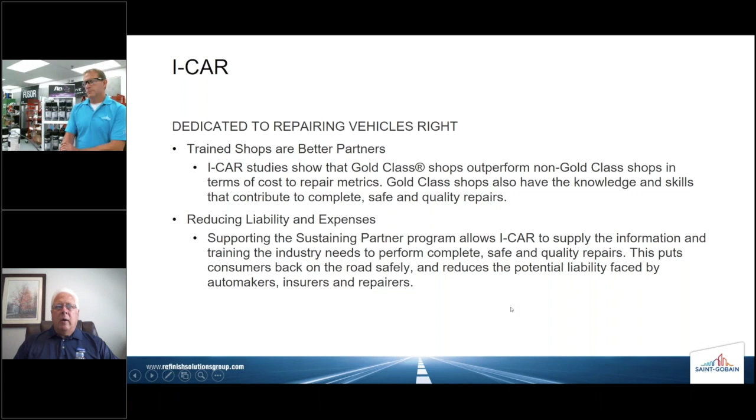This helps reduce liability and expenses in the industry, and that, in conjunction with following OEM procedures, can really help keep a shop out of the woods, out of trouble. Supporting the Sustaining Partner Program allows I-CAR to fully supply the information and training that the industry needs to perform safe and quality repairs. The end game is that it puts customers back on the road quicker, better, faster, safer, and reduces potential liability faced by automakers, insurers, and repairers. Everyone, all the stakeholders in the repair process.

Let me go back to that slide there for a second. We are dedicated to repairing vehicles right and providing the repair information. The education and information I-CAR provides emphasizes the importance of using quality parts and services and OEM repair procedures.

From time to time, I'm still surprised at the number of shops that I visit that when you ask the first question about how they built their repair plan, how they developed their blueprint for repairing the vehicle, it doesn't include consulting OEM procedures, and that's really a very important part of the equation. OEM repair procedures change from one model year to the next, depending on materials and new developments or new modifications to a vehicle. And it's really important to consult those repair procedures every time.

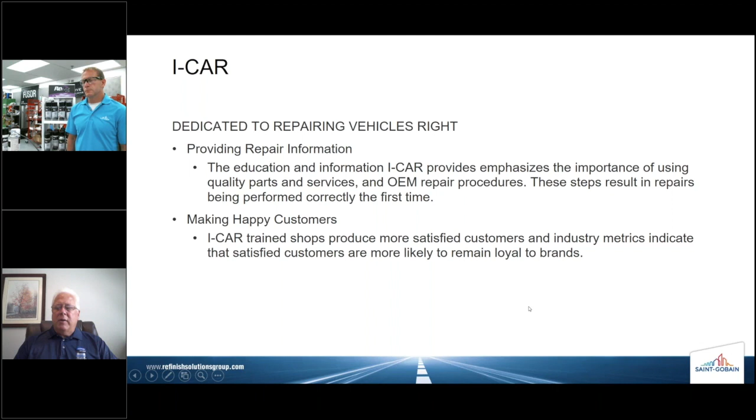I-CAR wants to make customers happy, of course. I-CAR trained shops typically produce more satisfied customers and better metrics overall, including all the key performance indicators, key productivity indicators that are used in a shop.

Testing. There will be a test at the end of the course. If you're paying close attention, you'll pass the test very easily. Passing the test will allow you to receive a certificate affirming completion of this course. Once that certificate is in your hand, you may apply to I-CAR for the appropriate credit. I'm happy to add that most of that process now is done electronically. There's not a lot of paper shuffling between us and the end user and I-CAR, and it really cuts down the time involved in obtaining certification. Passing that test will allow the student to apply for that credit of 1 hour.

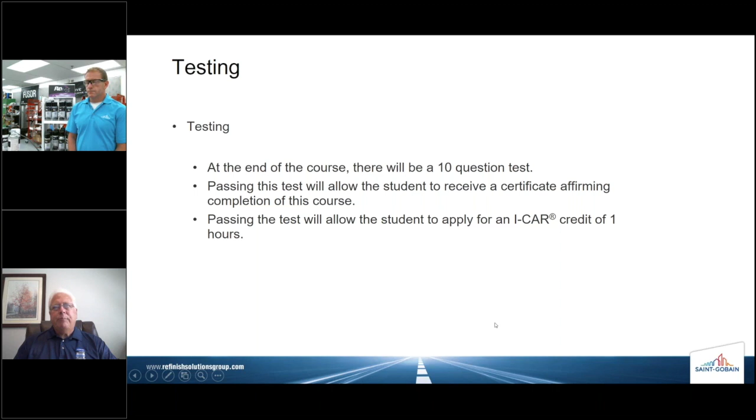So no presentation on collision repair training would be complete without a reminder about safety. Probably 6 or 8 months ago, the only folks that might recognize the acronym PPE would have been people in the healthcare industry and perhaps in the collision repair industry. But now PPE is an everyday household term, unfortunately, thanks to the pandemic environment that we're living in. But in any case, whenever you are attempting a repair, make sure you're wearing proper PPE, practice safe habits, keep sparks and flames away from the area, avoid skin contact, wear gloves, protect your eyes, of course.

And I say wear gloves even though you may never have had a particular reaction or allergic response to a chemical or a series of chemicals in the shop. Those types of reactions happen over time, and at any time you can develop an allergic response to some of the products that are used in a body shop. So protect your hands and your family, of course, as well. In the event that you happen to get eye contact, please immediately flush with water, contact a physician, and make use of an eye wash station in the shop as soon as possible.

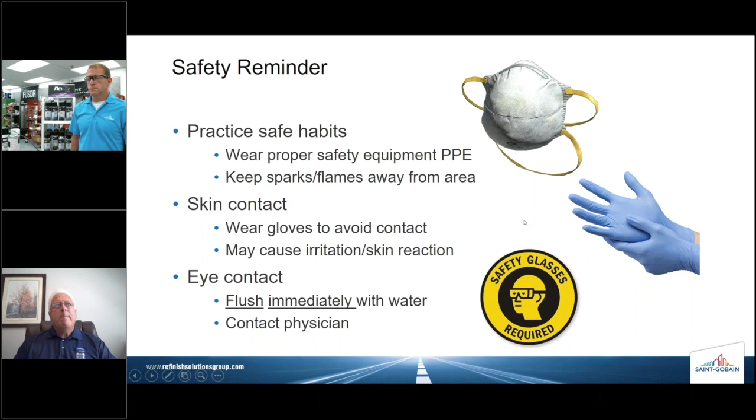The objectives in this course are going to be to talk a little bit about the proper handling of aerosols. We're going to introduce you to the 3 C's of aerosol product use, which are cleaning, coating, and corrosion protection. We've broken it down into those 3 categories. We think that it makes the most sense, and hopefully you'll find that to be the case as well. So I think this is your cue, Dennis, to step in and start talking about the actual products themselves, and I may chime in from time to time here.

I hope you do. I apologize to everyone. My computer screen will probably be delayed just a few seconds. There we go. Thank you.

Proper handling, right? So we want to make sure we shake the can just like this, for 2 minutes, and use it in a well-ventilated area. No, I'm not going to read the slides. Just make sure you're in the right temperatures. I'm in the Northeast. It's going to be cold here in about 3 months. You want to make sure that it doesn't get too warm or too cold. So if you can keep it around 68, 70 degrees, we're going to be in good shape.

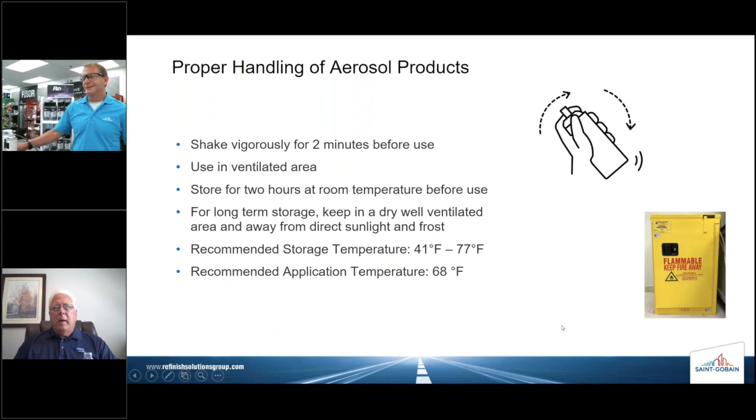I know it takes a little bit. Yeah, well, it's taking a little bit on my end too. Not sure what's going on. It happens. There we go. We'll get there.

Should have. So, got it.

So to maximize the lifespan of the aerosol, you want to make sure you invert the can upside down and clear it out so it doesn't get plugged up. You want to make sure the nozzle is clean. If there is a little material on it, grab some thinner, grab our spray gun cleaner, wipe the nozzle off, and you're good to go. Again, invert the can, spray out some material just to make sure it's cleaned out, and you're good to go. That's something that's commonly missed though, right Kevin?

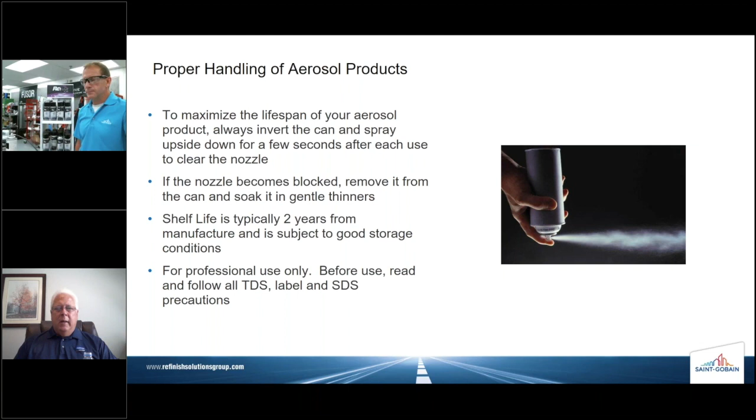Not inverting the can, it is. Yeah, it is. You know, I've seen a lot of pretty drippy looking cans in the shop, and it never ceases to amaze me at the surprise shown by the technician when it won't spray properly. Absolutely.

So clean the vehicle first. Make sure you take care of it with the solvent-based wax and grease remover, wipe dry. Use an anti-static anti-silicone degreaser. We want to kill the static just to make sure that we don't attract any dirt. And make sure that you wipe in one direction.

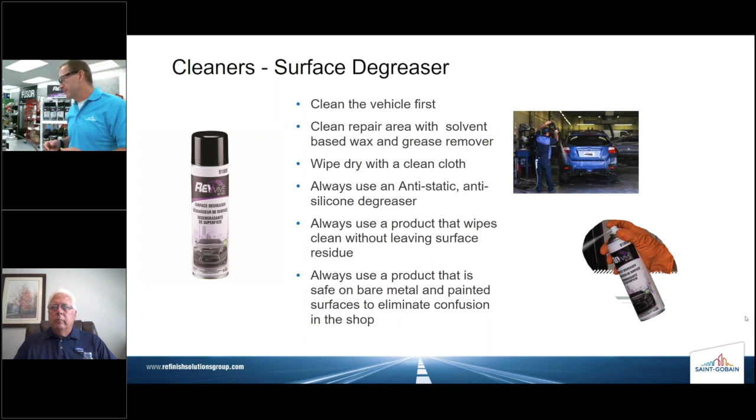Okay, because the idea of the cleaner is it floats the contaminant to the top. You want to wipe it away in one direction. If you go like this, it just kind of smears it around. So if you roll it, wipe one direction, roll the towel, and go like that, you're in good shape. Keeping it clean.

You get that, Dennis? It's getting there. It's getting there. It's like a fade. I think they slowed down the internet today.

There we go. Spray gun paint removers. If you put it in an aerosol, you can take a gun like this, go ahead and put an aerosol right into it. It's going to be a faster way to clean the gun, because it's pressurized, right Kevin? So instead of dunking the gun in thinner, we're going to put an aerosol into here. It's got pressure behind it. It's going to clean real well, and it's going to be a faster way to clean the gun. So be aware of that.

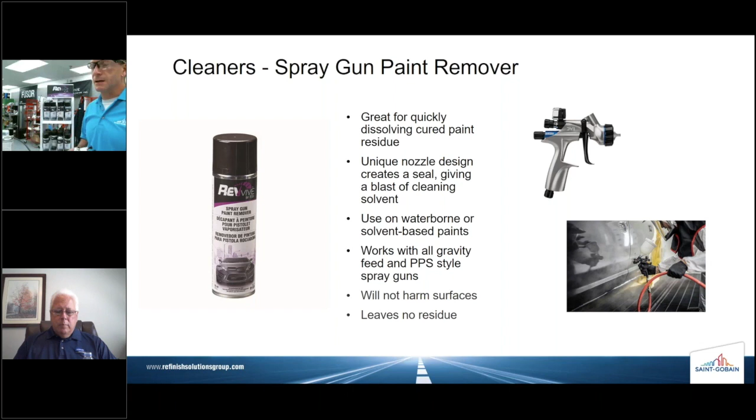That nozzle design gives you a nice seal too. Absolutely, yep, little rubber gasket on there, and you shove it right into there, and pull the trigger, depress the trigger, and it comes right out, and it does a really nice job. Really speeds up that cleaning process. So important, right? Excellent.

Aerosol coatings. So we have an array of coatings that are duplicating the colors of e-coat. And a great picture right here of an e-coat tank. But if you damage or have to remove some of the e-coat to maybe resistance spot weld, but then you need to put that colorant back, we have an array of colors, anywhere from black to gray to white to a couple olives, and they're going to match that OEM.

So that's really what's going to be really nice. It can be used as a direct to metal primer. It has good corrosion protection. You just want to make sure you get enough of the material on, and then you'll be good to go. But that's really a critical time, not only to take care of those bare metal areas.

But also, Kevin, if you have let's say a black e-coated part that you're putting on the car and it actually was an olive green, you need to change that color. This is a good way to do that. I know several shops in my area that will do that. So consider that as part of the process.

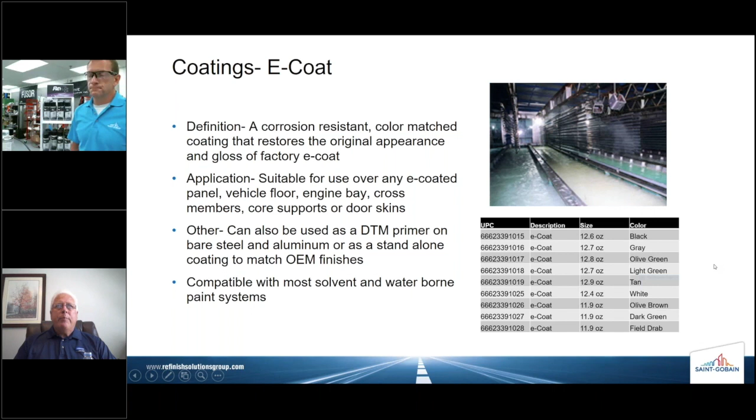Yeah, and to your point, Dennis, a lot of OEMs are starting to get very particular about reapplying primer or applying the correct e-coat coloration on the inner surfaces as well as the outer surfaces. So we've got some great solutions here for you. Sure do. I'm going to match that color too. Really nice.

So how are we going to do it? We're going to use our cleaner, our degreaser. For bare steel and aluminum, you want to sand that with at least P320 grit. No etch primer required, direct to it. Shake the can thoroughly for 2 minutes, apply 1 to 2 coats, 5 to 10 minutes between flash, and you're good to go from there.

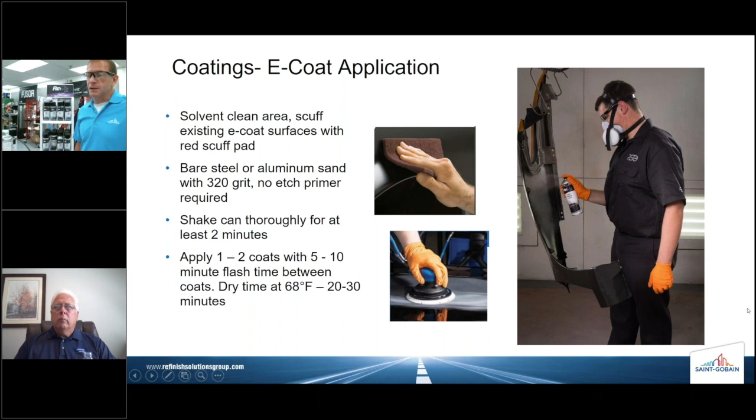Hey Dennis, why is it important to allow that flash time? What could be the result otherwise? Great question. So if you don't, you're going to trap solvents in there. And trapping solvents is bad because all the solvent will leave the job. We want it to leave when it's fresh and not a few months later. If you pile a couple coats right on top of each other with no flash time, that's when the solvent will leave down the road.

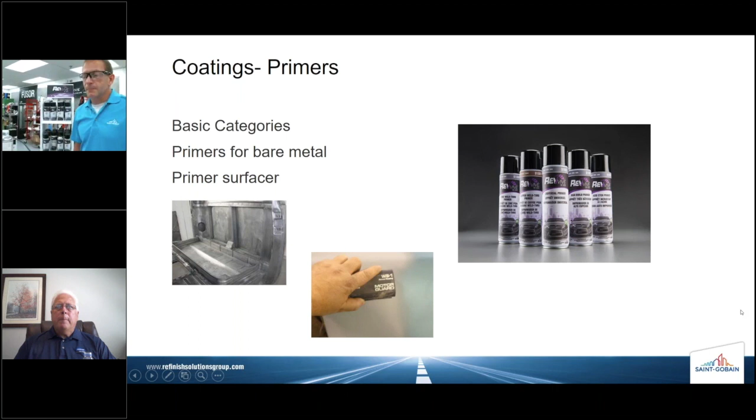Good point. We do have an array of primers for bare metal and primer surfacers, high build to acid etch, and whatever your need is, we can take care of that.

Weld-thru primers, great adhesion and an inhibiting formulation. It goes to bare metal, galvanized. Both formulations have corrosion inhibiting agents. When you do weld, you want to pull that material back from where you're actually striking the torch.

A lot of manufacturers are going to require you to use a weld-thru primer, so you want to do what they ask. And it'll have great corrosion protection if you're spot, MIG, or TIG welding.

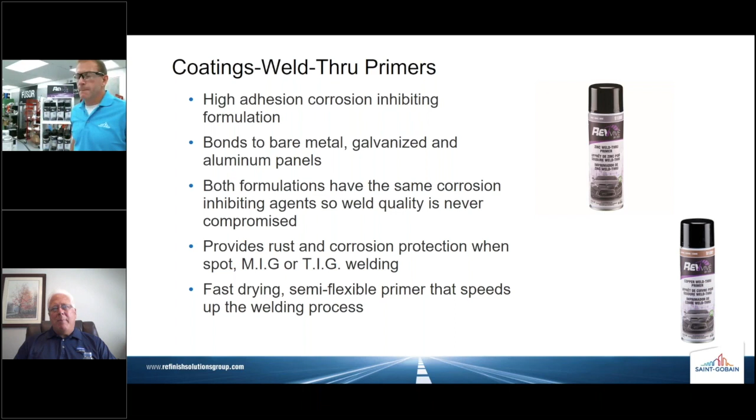Hey Dennis, I know you're a certified instructor for welding with I-CAR. What is I-CAR's position on the use of weld-thru primers? Are they optional, mandatory, what do they think? So I-CAR is going to revert back to the OEM, and if the OEM says to use it, then that's when you're going to use it.

I believe Honda just came out with something on the use of weld-thru primers. I can't remember exactly, but I thought there was something there. Some manufacturers are going to say to use it, a lot of them, and a few may say not to. Just do what they say, and that's what we're going to go along with. OEM procedures, OEM processes trump all.

So with the weld-thru primers, you want to clean it, you want to abrade it to 180 to 220. Again, apply 1 to 2 coats depending on how you spray it. Allow your flash time, 10 to 20 minutes between coats depending on your heat. Film build, heat, humidity is going to change that. And again, remove that away from where you're going to strike the torch.

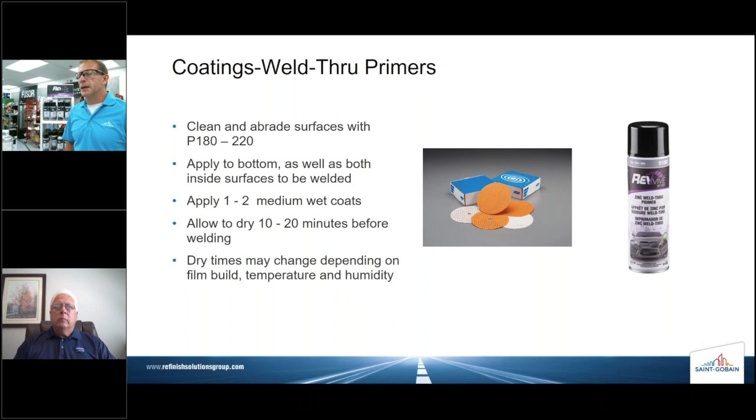Got a new one here. It's coming. There you go. Rocker panel texture coating.

And this is something, Kevin, that's just not going away, and it's a great thing, right? The whole idea of it is to add a coating so it can absorb chips, rocks, and all sorts of debris that's flying around, on road surfaces, sometimes on a dirt road, whatever. We want to protect that paint coating and really protect the metal.

So the manufacturer will use a texture coating, and you see it right there, a durable coating that protects against stone chips, salt, and whatever else it's going to beat up on it. We have a great rocker texture coating, and you do not want to over apply this material.

Let me explain that. You're going to apply a medium wet coat, let it flash. Critical thing here, Kevin: if we pile on 3 coats in one sitting, it may look okay, but there's a truckload of solvent in there, and that solvent's all going to leave, which could potentially cause problems down the road.

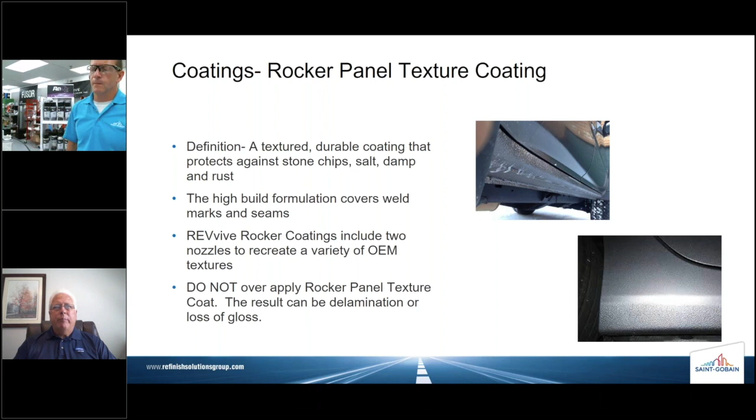I think it's also worth noting that the REVvive rocker coatings include 2 different nozzles, so with a little experimentation you can duplicate a whole bunch of different textures and shapes and sizes of rocker coating. We would encourage a shop to do some spray-outs before they actually apply it right to the job, and dial in exactly the build they're looking for. Absolutely, don't practice on the car.

So one more slide on texture coats. Surface prep.

You got that yet? Got it. Just came through. Surface preparation.

Make sure it's clean, degreased, dried. Abrade either wet or dry, 180 to 240 grit. Make sure you have our etch primer down first if there's bare metal, then shake it for 2 minutes. Apply 1 to 2 coats around 25 centimeters back. You can adjust that distance - the farther back you get, the smoother it is, the closer it is, the more texture. It's kind of like spraying, but make sure you wait your flash times between coats.

So tricky question there, 25 centimeters. What are we looking at there? I'm going to say that's about 8 to 10 inches for those of us on the American system rather than the metric system.

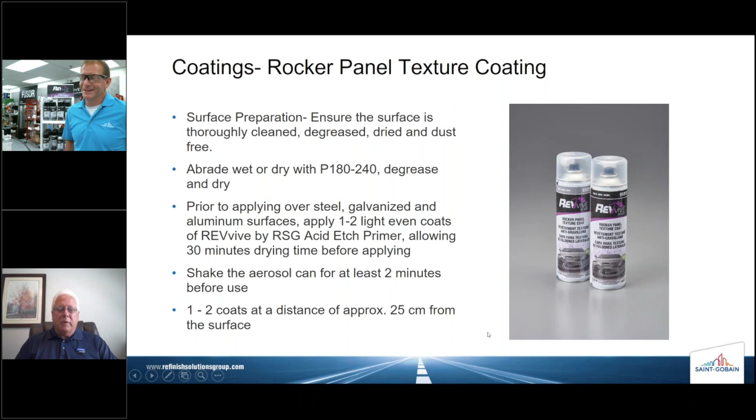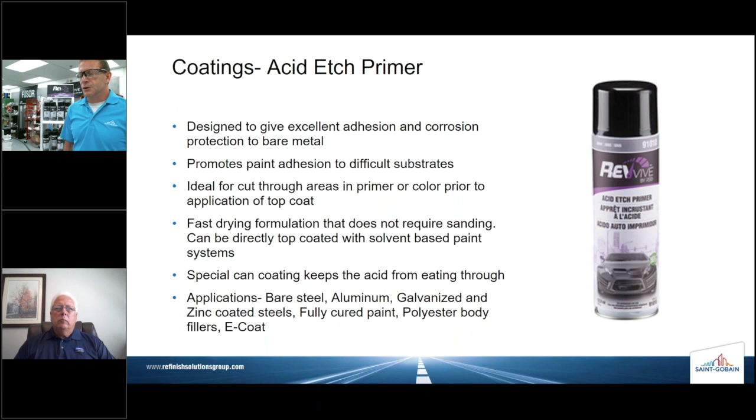So how about that acid etch primer, Dennis? How about that acid etch primer, Kevin? It's designed to give excellent adhesion and corrosion protection on bare metal. It's not designed to be over-applied - it needs to stick to the metal. Ideal on cut-through areas, and fast drying gets you through that. When you say cut-throughs, anything in the front end of the car, you want to deal with that. On bare steel, aluminum, galvanized, zinc - whatever you have, that's what you want to work with there.

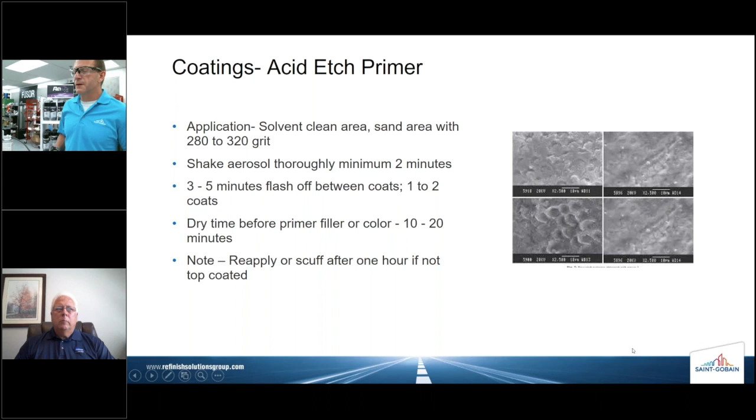Make sure it's clean when you're working this product. Sand it with 280 or P320 grit. Shake it again for 2 minutes - very common. 1 to 2 coats of it, and then if you're going to put primer, filler, or color, 10 to 20 minutes dry time. If you're going to reapply, scuff it after 1 hour. It's not top coated - really, really nice product here.

And now we're at the portion of our presentation where things get kind of interesting here. We have a complete line of material designed for corrosion protection in the REVvive product line. Dennis is going to talk to you a little bit about the products included in that category, starting off with rubberized undercoating.

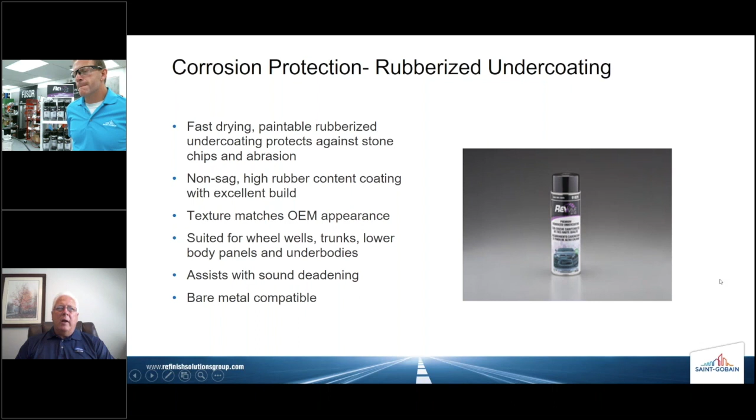Thanks, Kevin. So rubberized undercoating has a high use in the collision shop. The undersides of the car will have this, potentially from the dealership. This is a non-sag, high rubber content, black coating. It's going to match that OEM look, nice for the wheel wells. It's fast drying and it looks really good, and it can go onto bare metal. It's a great sound deadener as well, and it's not one of those thin, cheap asphalt-based products out there. This has definitely got high solids and great content to it, and I encourage you to give it a shot. Meat and taters, right, Kevin? Yep.

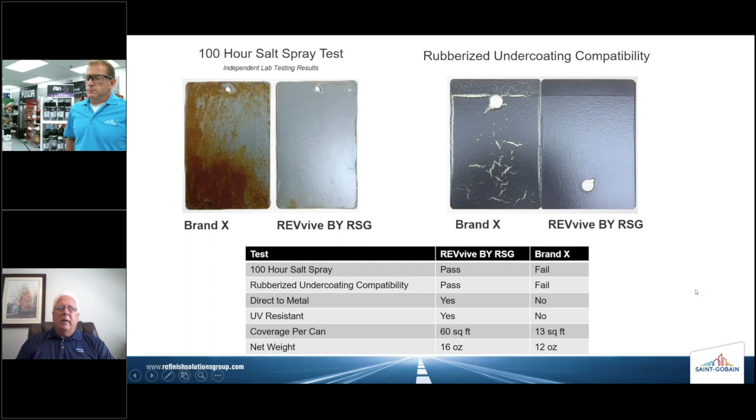All right, this is kind of cool - our rubberized undercoat, how it goes against other brands in salt spray testing. I think the picture says it, I don't really need to add much to it. No, but the salt spray testing is a pretty key OEM metric or test. Whether it's 100 hours of salt spray or cyclical salt spray, most of the OEMs are looking for some type of test data that supports that type of product, or to support any product of that type.

So here's one of my favorites - corrosion protection cavity wax. Why do we use it? Well, because the OEMs want you to use it. It's a really important part of the process - up until the last probably year or so, the OEMs want you to use this product, right, Kevin? Not only on a repair area, but also on new parts that you replace. They want you to put cavity wax in there even if it didn't come with it. They want you to put it in there after it's painted. Very, very important piece of coatings that go into that vehicle.

Yeah, I couldn't agree with you more, Dennis. And this product has really come a long way. I'm kind of an old guy, so I remember the days where Ziebart and Rusty Jones used to offer rust proofing services and cavity wax protection, and even some shops and service departments got into that type of installation. It required some 55-gallon drums of material, long wands for application, drilling and cutting - and it's not like that anymore at all.

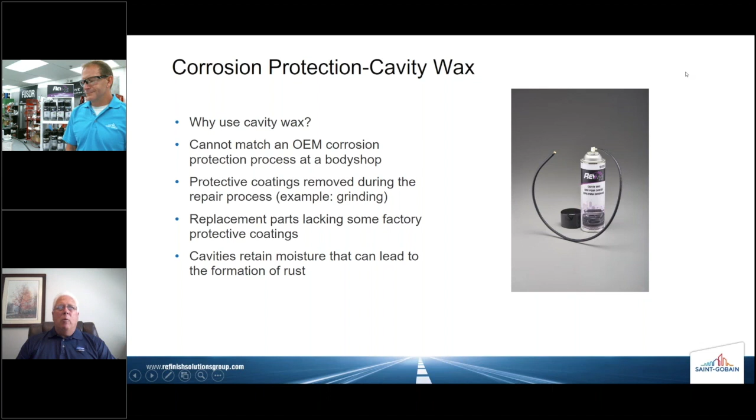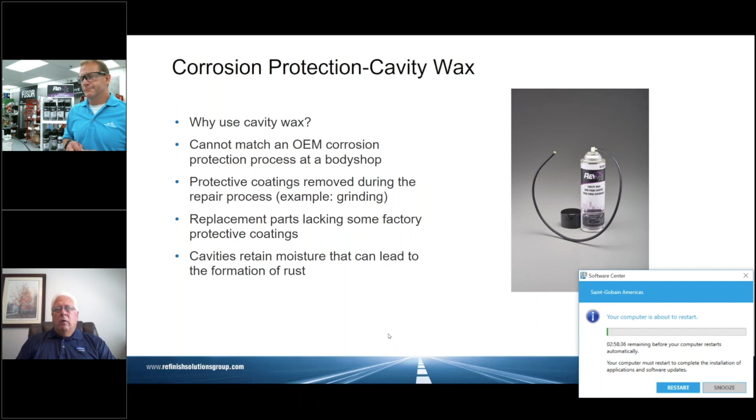No, we have this down pretty much to a science, and the product is extremely easy to use, cleans up well, and in fact, if we can, I think we're going to try and do a little live demo here. Little demo here, little demo action. Set up.

So I like to do this. I like to grab a high-visibility tape, I'm grabbing the American OEM tape, and Kevin, I like to tape the end of the wand. I'll tell you why I like to do this. I do not want cavity wax in my face. Sounds fun, but I really don't want that. So when I insert it in, as it comes out, as soon as I see orange, I'm going to let go of the trigger so I don't get the 360-degree spray in my noggin or wreck my nice shirt.

Putting my gloves on. I've got a little wand right here. Okay, so check this out. All right, get the wand right in there. And I have shaken this already, and watch this.

What you do, let it flash, rotate the wand, which I did, and do another application. And that's it. As soon as I see orange, it's spraying that. Notice that it's coming out all around the base of the nozzle in roughly a 360-degree pattern. And what that means is that you're going to get coverage on the inside and outside of any cavity area, rail run channel that you happen to be trying to seal out.

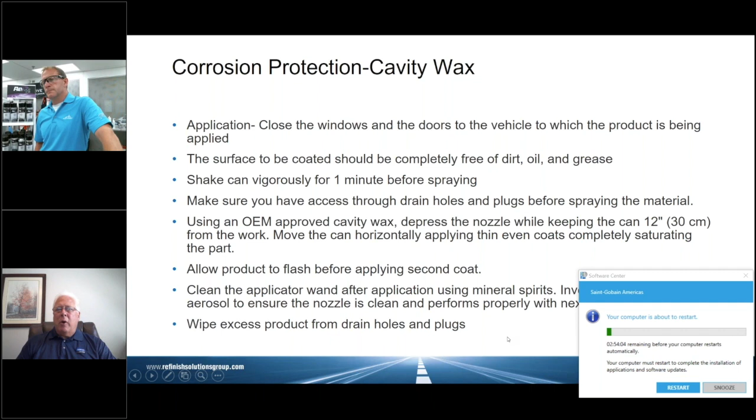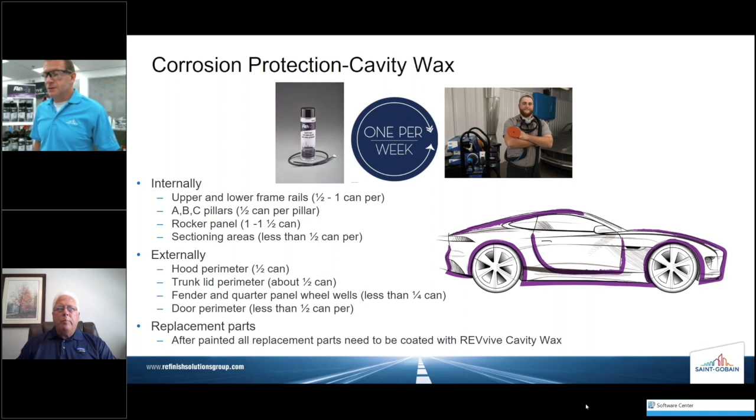Dennis, you want to bring us home here with some of the applications and areas? Absolutely. So, you see anywhere that's highlighted in purple right there is possibly where that material is going to go, depending, right? Your doors, your rockers, rear body panels, front fenders, hoods, anything external. Replacement parts, something you've painted, most likely the OEM is going to want a cavity wax application.

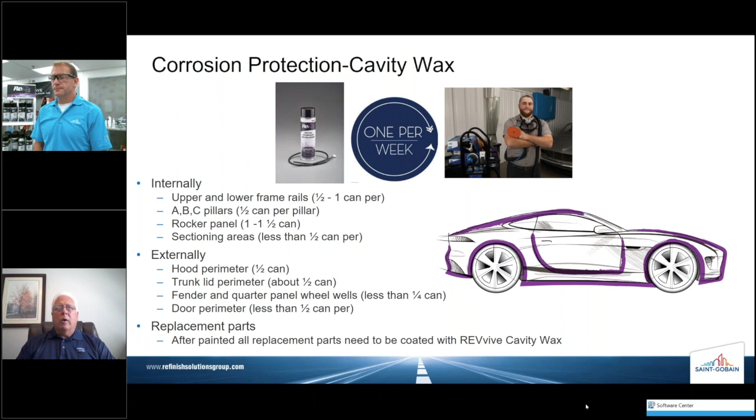We're looking at a can per week per tech. One can per week per tech, believe it or not, Kevin. Having a lot of distributors through my doors here a year, I know that there's a lot of opportunity to put more cavity wax on these cars. How's that? Yeah, one can per tech per week doesn't sound like a lot of material, but that's a lot of insurance and a lot of protection for a lot of work that customers are going to be really satisfied with in the long term.